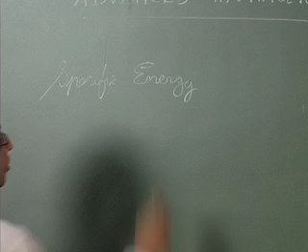We have given the definition of specific energy, and the equation for specific energy was mentioned in the last class. Subsequently, we discussed critical flow in a section, what is meant by critical flow, and all those things. We have suggested subcritical and supercritical flows as well. We have also discussed the criteria for a section to be critical flow.

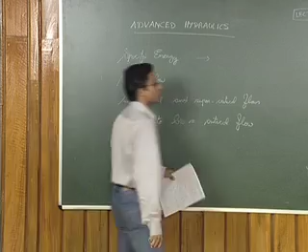This was also discussed in the last class. At the end of the lecture, we suggested that the quiz component for the topic will be given today. Let us start with the quiz itself, then we will continue with the next topics of our lecture.

So, our quiz, the first question is: what is meant by specific energy? You have to give the equation for this, as well as describe it in one or two sentences.

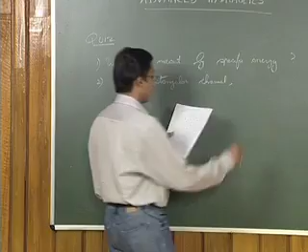The second question: in a rectangular channel, what is the criteria for critical flow? If discharge Q is given, you have to determine the criteria for critical flow in a rectangular channel section. Please note that in a rectangular channel section, what is the criteria for critical flow if Q is given? Also, the width of the channel, B, is given to you. You have to determine the criteria for critical flow in this rectangular channel section.

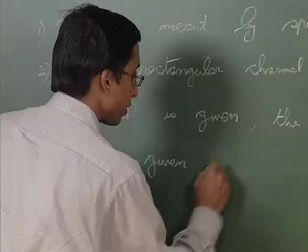The third question: for a given specific energy E, suggest at what state of fluid flow yields maximum discharge, whether it is subcritical, supercritical, or critical.

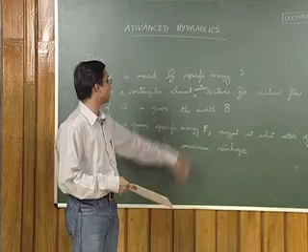So, I will give you 3 minutes to answer this. It is a very simple quiz, one of the easiest quizzes in our entire course. Okay, I hope you have answered the quiz questions.

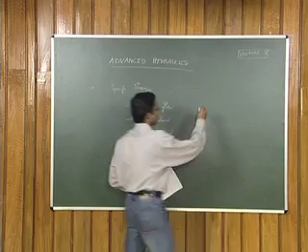Now, let us continue with our lecture. Based on the specific energy concepts, we have discussed critical flow, subcritical, and supercritical flow. Even for any arbitrary cross section of a channel, you were able to determine the specific energy curve. If you draw E versus Y, you get such curves. You can use the various criteria to determine critical flow or to measure the critical depth.

Now, for various cross sectional channels, whether rectangular, triangular, trapezoidal, or anything, it is up to you to engage with this. Take any arbitrary cross sectional channel and try to compute their critical depth or the criteria for critical flow.

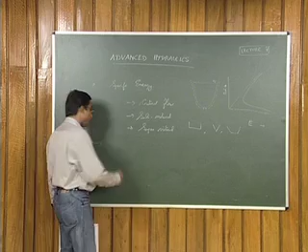What we want to suggest here is, now, if there are changes in the state of flow, that is from subcritical to supercritical, or from supercritical to subcritical, these phenomena occur very commonly in open channel flows. They are encountered in many types of fluid flows in open channels. So you have to understand what changes are occurring, and you should be able to solve such problems. Let us see, for example, what is meant by changes of state of flow.

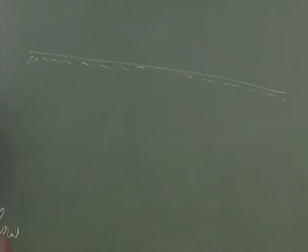If there is a long stretch of channel, and if there is a fluid initially in subcritical state, then over the long reach it reaches a supercritical condition. So this is the supercritical state, this is the subcritical state at this section. The flow in this long stretch changes from subcritical state to supercritical state. These things are commonly encountered in many open channel problems.

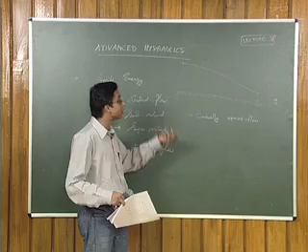This is a case of gradually varied flow. Suppose if the change from one state to another occurs over a long stretch, then such things are gradually varied flow. Suppose if this change of state occurs in a small stretch, they are called rapidly varied flow.

Rapidly varied flow you may encounter in hydraulic drops or hydraulic jumps. We are not going to go into much technical detail right now. At the present state, we are not going to describe much on that.

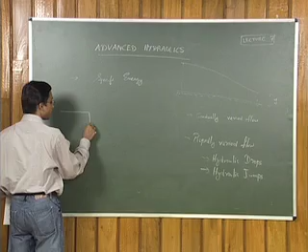Hydraulic drop means, say if the channel is there and the bed of the channel suddenly dips, then the flow here, two free surfaces appear, there will be two free surfaces now, and such type of fluid flow is called a hydraulic drop. Because whatever specific energy you have computed here and whatever specific energy you will compute there, based on energy conservation, you will see that the state changes, from subcritical to supercritical flow, that occurs in this case of hydraulic drop.

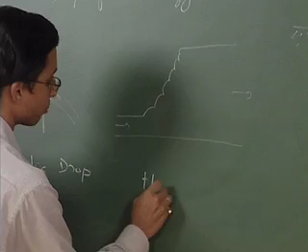This is a free fall hydraulic drop. Here's a hydraulic jump, from a supercritical flow, in a short span it becomes a subcritical flow. From a supercritical flow state, all of a sudden in a short span it converts into a subcritical flow state. Such rapid changes are also rapidly varied flow, seen in hydraulic jumps. Here from supercritical it is changed to subcritical.

We have other modules to discuss rapidly varied flow as well as hydraulic jumps, so we will not discuss much of that here. Instead, we will discuss energy in non-prismatic channels.

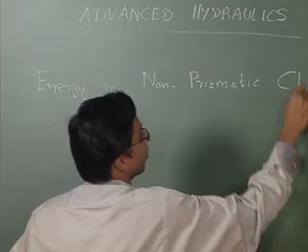Till now we were discussing how to measure energy in prismatic channels, that is, over a stretch of the channel, the cross section of the channel remains the same. That is what is meant by prismatic channels.

What happens if the cross sectional area of the channel varies continuously between two sections? Such channels are called non-prismatic channels. How do you compute energy in such channels? It will be quite difficult compared to prismatic channels.

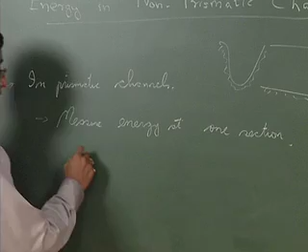In prismatic channels, you have seen that if you measure energy at one section, then you will be able to easily measure or compute energy at the downstream end. That is, from the conservation of energy equation, you will easily be able to compute energy at the downstream if the upstream energy magnitude is given to you.

What happens in the case of non-prismatic channels? In non-prismatic channels, the complexity arises that, say, if the upstream channel section is like this and there is a reach like this, and the downstream cross sectional details are like this...

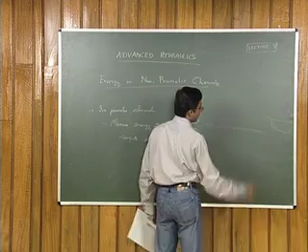There is a change in flow type from the upstream to downstream end. You will see such situations. In such cases, normally in non-prismatic channels, one has to measure energy frequently at several intermediate sections. Then you need to understand what type of change in flow is occurring, whether from subcritical to supercritical or from supercritical to subcritical, and identify those things. So what do you do in non-prismatic channels in such situations?

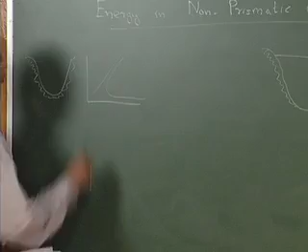As mentioned earlier, for prismatic channels, any cross section will yield you, for a given discharge, an E versus Y curve. Based on this curve, one can identify the flow depth or other parameters downstream in prismatic channels. Now in non-prismatic channels, if you identify such a flow...

See here, if this is section 1 and this is section 2, say if a flow is occurring in this way, that is, the depth of flow is changing in the non-prismatic channel. You have to compute - say if this is a subcritical flow and this is a supercritical flow - you have to draw the energy depth curves for this cross section as well as this cross section. How will it appear now?

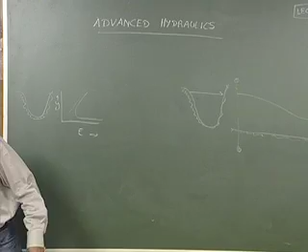Use the same formula. Say in this channel, if I try to draw the energy versus depth curve now, depth is already given to you here, say this is y1, this is y2 at section 2. If I draw in this direction the energy magnitude, then you can easily identify in the following form.

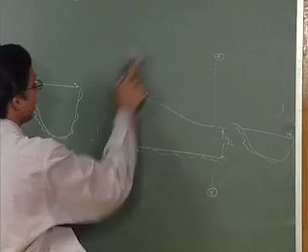Okay, I will just redraw the procedure here in a better way. For the upstream section, depth of flow, you can draw the corresponding E versus Y curve.

So from this particular curve, it is quite understood that the upstream flow stage is a higher flow stage on the E versus Y curve. We have suggested that for the same energy there will be two alternate depths, one at low stage and one at higher stage. So definitely the height of water as given here corresponds to the higher stage. So we suggest that the flow is subcritical. You extend the diagram now to the downstream.

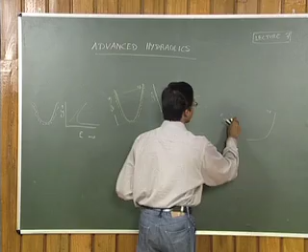Just a hypothetical extension like this. We do not know how the bed is varying, it is a non-prismatic channel. So if you draw the energy curve here, same energy curve, energy versus Y curve, you will see that in this particular case, your energy curve E versus Y may be something of this type, and this particular depth corresponds to some height in the lower stage. This height is a lower stage for this particular energy value, and you will get a corresponding curve like this. So like this you need to compute energy versus depth curve frequently in a non-prismatic channel.

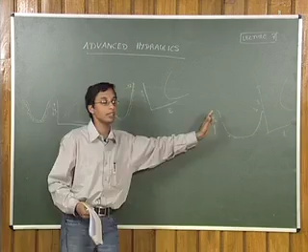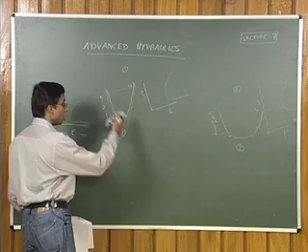If the flow changes from subcritical to supercritical, definitely there will be a section between section 1 and section 2. This is your section 1, and this is your section 2. Between these two sections, there will be some section in between where the depth of flow corresponds to the critical flow in that section. That is quite understood from this graph or diagram. So one may ask how to identify the critical section in a non-prismatic channel. You have to measure both the conditions, then subsequently identify the critical condition or critical flow.

If the alternate depths, whichever are given in the downstream end as given in the earlier figure, if in the downstream end it happens to be the lower stage and in the upstream end it happens to be the higher stage, from the energy depth relationship or energy depth graphs, definitely you can suggest whether it is a subcritical or supercritical flow. At any location in that energy graph, if there is only one depth coming into picture, that corresponds to the critical condition.

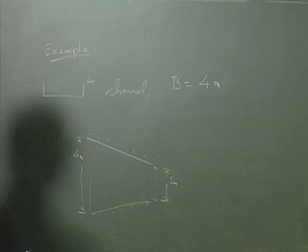Let us do an example. Suppose there is a rectangular channel of width 4 meters. Now this 4 meter width channel, if you view from the top, it is narrowing down to, or passing through a constriction, and this 4 meter wide channel narrows down to 3 meter. This is just an example. These are the side walls of the channel. The rectangular section is maintained here as well. This is upstream and this is the downstream.

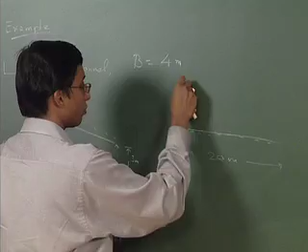If the upstream discharge is given - not only upstream discharge, we are dealing with the steady state problem, so the discharge is constant. If discharge is given as 3 meter cube per second, and if this constriction length is 20 meters, if the upstream depth of flow is given as 1.6 meters, you are now requested to find the water surface profile. You see from this 20 meters, as it passes through the constriction from here to here, what could be the water surface profile? You are requested to compute that. How will you approach the problem, or how will you try to solve that?

At the upstream end, let us give the section as 1-1, at the downstream 2-2, okay? So energy at the upstream section E1, in the rectangular channel this can be given as y1 plus q1 squared by 2g A1 squared. Substitute the corresponding values given here. You are given the depth of flow as 1.6 meters, discharge is given, area you can easily compute: 1.6 plus 3.0 whole squared by 2 into 9.81. A1 is your width, rectangular channel width is 4 meters. So we can suggest now 4 into depth of flow, 1.6 whole square. You calculate them, you will see that you will get the value as 1.6112 meter.

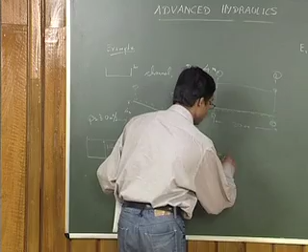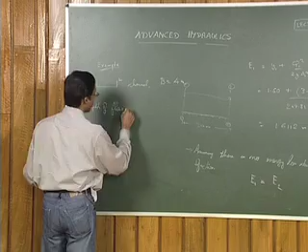Now in this problem we are assuming, please note that, assuming there is no energy loss due to friction. Based on this assumption, it will be seen that your energy at section 1 will be same, specific energy at section 1 and specific energy at section 2, they will be same. Now you know the magnitude of energy at section 1, this is 1.6112 meter. You also know depth of flow at section 1, or you can say at upstream, this is equal to 1.6 meter.

What could be the depth of flow in the downstream end when the flow passes through this constriction? You can find alternate depth at the upstream end. How will you find the alternate depth at the upstream end? E1 is equal to 1.6112 meter, or to avoid confusion, let us say at the upstream end E, I am just substituting it as E, this is equal to 1.6112 meters, and the equation for energy is nothing but depth of flow plus q squared by 2g A square.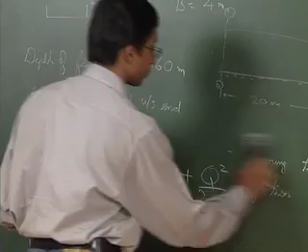As this is a problem where the discharge is given, you can write this as 1.6112 is equal to y plus 3 squared by 2 into 9.81 into 4y whole square. So, this will be the equation for the corresponding depths of flow.

One depth of flow, that is y equal to 1.6 meter, is already given to you, and when y is equal to 1.6 meters, this equation is satisfied. What is the alternate depth now? For a given specific energy, there are two alternate depths, one the lower stage and one the higher stage, and we do not know whether this y equal to 1.6 meter is a higher stage flow or a lower stage flow.

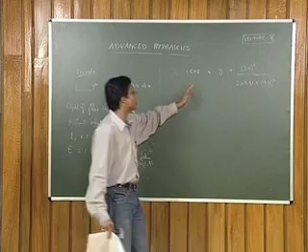You have to solve the corresponding higher order equation that is developed from this given relationship. What is the higher order equation that comes out from this relationship?

If you substitute all the values, keeping y as an unknown factor, and calculate all the things, you will get 1.6112 is equal to y plus 0.02867 by y square, or I can write this as a cubic equation: y cube minus 1.6112 y squared plus 0.02867 is equal to 0, a third degree equation.

The solutions for this equation, as it is a third degree polynomial, there will be 3 solutions. So if I write it, y1 is equal to 1.6 meter.

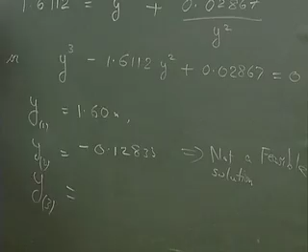Another solution that satisfies this equation was found to be minus 0.12833, and you know that in open channels this is not a feasible solution, since depth of flow cannot be negative. The third root found for this equation was 0.1396 meters.

So we get 2 feasible solutions: y equal to 1.6 meters and y equal to 0.1396 meter. These 2 are the alternate depths. So at the upstream end, the alternate depths are y1 equal to 1.6 meter, and the corresponding alternate depth equal to 0.1396 meter. This is a subcritical flow and this is a supercritical flow.

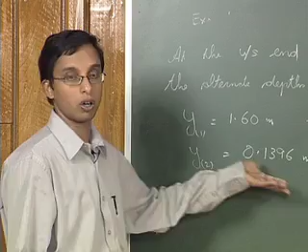The flow passes through the constriction and we have not provided any hydraulic drop or jump in between the constriction. So we need to compute the depth of flow in the downstream section, and based on that identify whether it is a supercritical, subcritical, or critical situation.

At the downstream section E2, neglecting the losses, this is same as 1.6112 meter. Again use the same relationship at downstream: y plus q squared by 2g a square. This is equal to y plus the discharge is same...

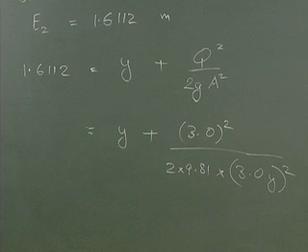And area. At the downstream, the width of the channel is 3 meters, so 3 into y whole square. You will get a corresponding third degree polynomial. On rearranging the terms, you will get the third degree polynomial of the following form: y cube minus 1.6112 y squared plus 0.051 is equal to 0.

Solve this cubic equation. We get 2 feasible solutions; the third one is non-feasible, which I am not going to write here. The feasible solutions are 1.591 meters and 0.1894 meters. So at the downstream end, we do not know which depth is coming into the picture.

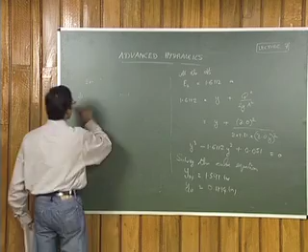Can you give a guess, in the upstream end and downstream end, as the flow occurs through a constriction?

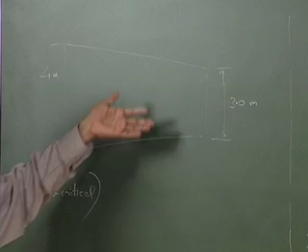Definitely at the upstream end the flow is subcritical. And in the downstream end we have two alternate depths, 1.591 meters and 0.1894 meter, which could be the depth if there are no structures provided in between. When the flow occurs through this contraction, without any hydraulic drop, hydraulic jump, or other structures, the subcritical flow should be maintained, and hence at the downstream end your depth of flow will be 1.59 meters. Seeing the magnitude, you will see that the flow profile or surface is almost horizontal as subcritical flow is maintained, though the velocity will be different.

Till now we have discussed the energy equation and conservation of energy in open channel flows. Let us now consider the momentum equation. In one of our earlier lectures we discussed momentum and momentum correction factor in open channel flows; let us come back to that. How do you apply the conservation of momentum, and how do we apply various laws of physics related to momentum in fluid flow in open channels?

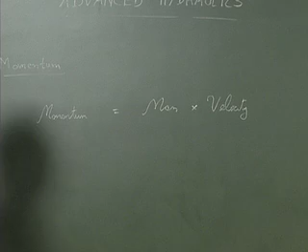Momentum is nothing but mass into velocity of an object. The same phenomenon if you apply in open channels, you can use the same principles to calculate the momentum and also conserve it—from Newton's second law, the rate of change of momentum is equal to the net force, wherever in whichever direction you are dealing, the net force in that direction will be equal to the rate of change of momentum in that direction. Let us come into that.

If you take any arbitrary volume of liquid, mass is nothing but density into volume, then into velocity will give you the momentum, that is rho del V into V, volume. For volume I can write del V into velocity.

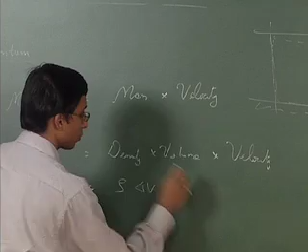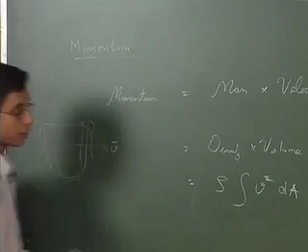We suggested that if you are using for any cross section, if you are taking the average velocity term, then to compute the momentum you need to incorporate the momentum correction factor beta into the computations. This is nothing but rho into V squared dA. From any velocity profile, this is nothing but integral of v square dA. This can be given as beta rho average velocity into area.

Most of the time we are dealing with constant discharge, so beta rho Q into v bar, like this also we can write.

So from Newton's second law, that suggests that rate of change of momentum is equal to the resultant force in the body.

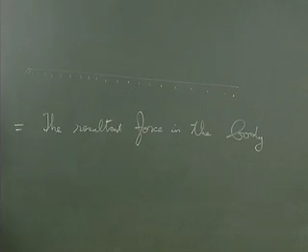So if you consider an open channel section, if you consider a stretch in the open channel, take two cross sections. Suppose the channel is having a slope with the horizontal angle theta. We are considering two cross sections: section 1 having area A1, and section 2 having area A2.

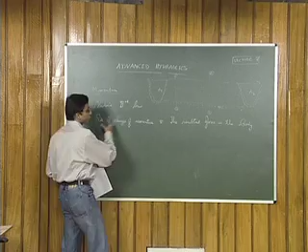What do you mean by rate of change of momentum? As we are dealing with steady state flow, whatever momentum is there comes from the mass of water stored between these two sections. Let us mark this as a dotted line between two sections. If between these two sections this entire stretch is at a length L, and one point is located at Z1 height, this other portion is located at Z2 height.

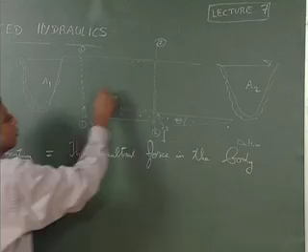Consider this dotted portion—this acts as a volume of water. We can consider the volume of water within this reach now. You have a cross section here, a cross section there, and this much stretch in between. The mass or amount of water stored here gives you the mass of water in this entire portion. Now the momentum flux that comes into the section from the left hand side, and whatever momentum crosses through the section on this side, that gives you the change in momentum.

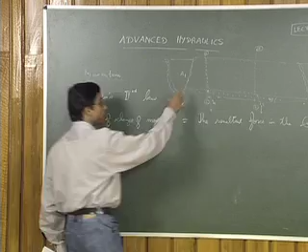The change in momentum—whatever momentum comes in and whatever momentum goes out, the difference between those two momentums gives you the change of momentum. And the rate of change of momentum means the rate at which the momentum gets changed, that is the change in momentum, you can say del m.

If I am defining m as the momentum, m is equal to mv, beta mv, then the change in momentum can be given as del m between these two sections. That can now be computed. That gives you the net force that is there in the body now.

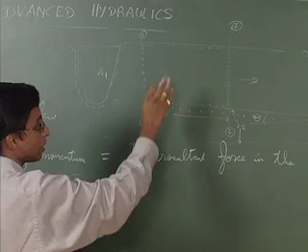So the net force will occur in the direction of flow. The direction of fluid flow is here in this particular direction. As open channels, we are predominantly considering one dimensional fluid flow, where there is no fluid flow in the vertical direction—that is not being considered here—only the flow along the bed of the channel.

So how will you compute the change of momentum here? I can say del m is equal to—first let me compute momentum. Momentum at section 1 is equal to beta1 rho Q V1 bar. Momentum at section 2 is equal to beta2 rho Q V2 bar.

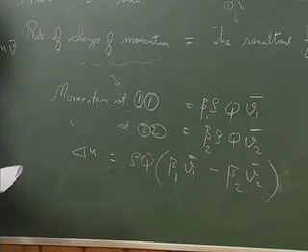The change in momentum will be del m is equal to, you can take rho Q out, beta1 V1 bar minus beta2 V2 bar. So this will be the change in momentum. The rate of change of momentum, or the change in momentum per unit time, gives you the net or resultant force of the entire control volume. Whatever dotted line you consider as a control volume, whatever force leads the flow, that can be corresponded with respect to the change in momentum or rate of change of momentum.

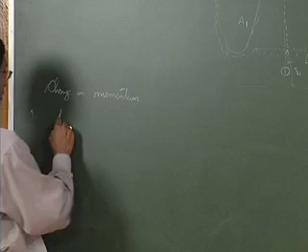So, we suggested that change in momentum in a time is equal to beta 2 V 2 bar minus beta 1 V 1 bar. That is the momentum coming out and momentum coming in. The difference gives you the change in momentum, and the change in momentum per unit time is the same, equal to rho q beta 2 V 2 bar minus beta 1 V 1 bar.

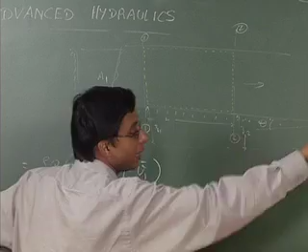What is the net force in the direction of flow? If you look into this control volume, as mentioned earlier, there are no flows in the vertical direction, and assuming predominantly it is in the direction of the inclination of this bed itself. So, the direction of fluid flow is in this direction, and the net force will be in this particular direction.

How will you compute that? You know the weight of the liquid stored within this volume, or weight of the liquid from this volume of water. You can give it as rho g into some volume V, right, rho g into this volume of water. So, we do not know what is the volume of water, we can compute, we will come into that.

There, say if you take this section out, I can just take that section out now. This is how your section will look like. Here the depth of flow is y1, here the depth of flow is y2.

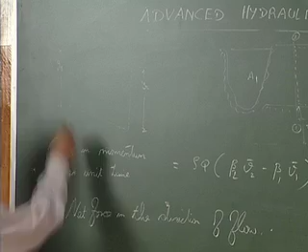So, if you take the components out, as discussed in our earlier lecture, whatever pressure is there will now act on this particular plane, because we are taking this particular volume out now like this. So, in the downstream the pressure force will be in this direction, in the upstream it will be in this direction, because we are taking a plane perpendicular to the board now. So, the force due to pressure, I can give it here in this direction F p, or F 1, let it be here F 2.

This again can be made into components, one in the direction of flow, one normal to the bed, here also like this. So, I can give this as F p 2, F p 1, this one also in the vertical direction, the components will be there. So, we are interested only in the direction of fluid flow, that is along the bed, only the net force in that direction we are interested. So, let us consider whatever is there in the direction of flow.

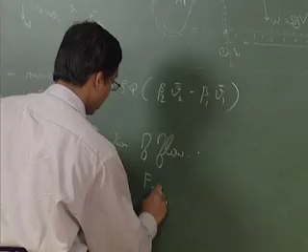So, W, its component will be there, W sin theta in this direction. So, I can say the net force now will be equal to F p 1 minus F p 2 opposing the flow, W sin theta, minus frictional force -- there will definitely be frictional force opposing the fluid flow. So, these quantities now you can equate it here. I will get this as rho q beta 2 V 2 bar minus beta 1 V 1 bar is equal to F p 1 minus F p 2 plus W sin theta minus F f.

Once you equate this, you can now subsequently suggest various simplifications. Say if the channel slope is not that much, you can see that the component of weight in the direction of flow will be negligible. If there is no frictional resistance, or if the frictional resistance is negligible, even that component can be eliminated. But this is the momentum equation in general for such open channel fluid flow conditions.

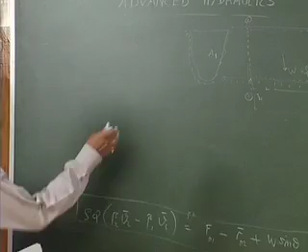Generally for fluid flow, if you have parallel flow or gradually varied flow between two sections 1-1 and 2-2, then you can suggest that your pressure is hydrostatic, or in section 1-1 at any depth y, at any depth of flow y, P1 will be equal to rho g y1 cos squared theta, P2 is equal to rho g y2 cos squared theta. These were derived earlier.

Therefore, you can suggest that from this pressure you can easily measure the force due to this pressure.

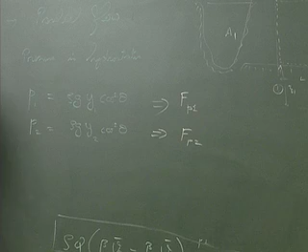You can easily measure them. Pressure into area gives you the force in that corresponding direction. So that can be computed. You can substitute those things subsequently if it is parallel flow or gradually varied flow.

Suppose what happens if I suggest a rectangular channel, width b. What happens if this is a rectangular channel? That is, this section will look like this and this section will look like this.

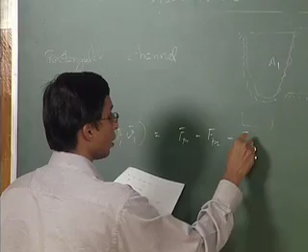You can now write the corresponding equation, rho Q, beta 2 V2 bar minus beta 1 V1 bar. This is equal to F P1 minus F P2 minus F F plus W sin theta.

Your F P1, this can be given as half rho g y1 squared into b. I hope you understood what this means. F P1 is half rho g y1 squared b. F P2 is equal to half rho g y2 squared b. So you substitute this here.

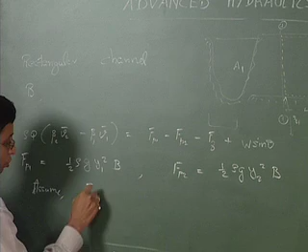Another thing is, suppose we assume the frictional resistance F f, this is nothing but something related to the weight of water in this volume, and its component, which you can relate to weight as well as the frictional head. So I can write it in the corresponding way: this is rho g b y bar into h f dash, where h f dash is the frictional head.

It is the frictional head, units of length, and y bar is the average depth of flow between the two sections 1-1 and 2-2. I can easily suggest that this is nothing but y1 plus y2 by 2. If you incorporate this relationship and all the other terms into the equation, I will get the corresponding form.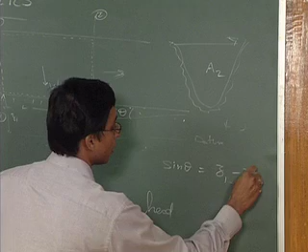Also you can suggest the sin theta term here. Sin theta is nothing but z1 minus z2 by L. You can also see that...

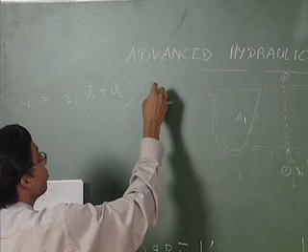As q, the steady discharge, will be same throughout, I can compute it as related to the average depth of flow. For that I can write q equal to the average velocity between two sections: V1 bar plus V2 bar by half, that is the average velocity between these two sections, into the average depth, into the width of the channel. So if the width of the channel is not changing here, you can correspondingly write it as well.

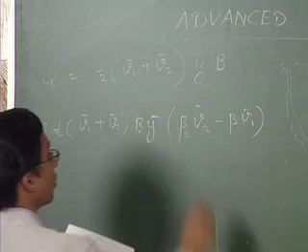So we will get q in the following form. Our momentum equation becomes: rho into half of V1 bar plus V2 bar, into B y bar, this is equal to rho g y bar, L into B, Z1 minus Z2 by L, plus...

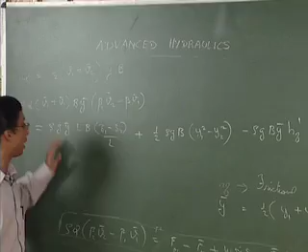This momentum equation, for this particular case of a rectangular channel having width b, we can write in the following form. Please note this is for any general area, and for the rectangular channel of width b, this can be represented in the following form.

You can cancel out whatever terms are repeating. You see rho b y bar repeating on LHS and RHS, you can cancel it out. You can also substitute appropriately the terms. You see y1, here half into y1 plus y2 term is coming, that you can give as average depth y bar. Like that you can eliminate the terms.

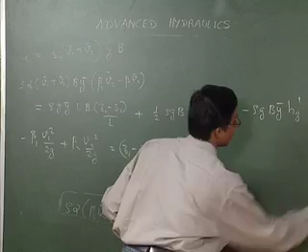This can be written as minus beta1 V1 squared by 2g plus beta2 V2 squared by 2g is equal to Z1 minus Z2 plus y1 minus y2 minus h f dash, or rearranging: Z1 plus y1 plus beta1 into V1 squared by 2g is equal to Z2 plus y2 plus beta2 into V2 squared by 2g.

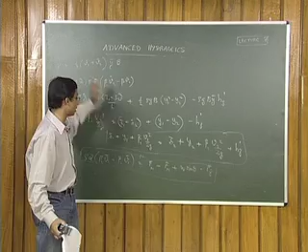You have seen a similar relationship already in the energy equation. Another thing is coming here now, for example I just forgot to write h f dash here. A similar relationship as found in the energy case is again found here when computed through the momentum equation. The h f dash, the frictional head computed using the momentum equation, is quite different compared to the one computed using the energy equation. Here you are using the average depth term y bar, using those things, the things come out here. So there is a little difference between the energy equation and momentum equation for the rectangular channel.

However, for gradually varied flow or uniform flow and all, you will see both are same. Now we will discuss the concept called specific force.

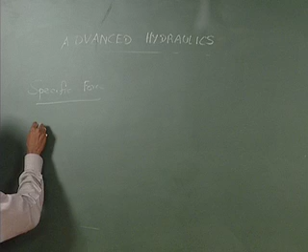What do you mean by specific force? What was the momentum equation you have seen earlier? It was rho q times beta 2 V2 bar minus beta 1 V1 bar, equal to F p1 minus F p2 plus w sin theta minus F f. This was the momentum equation discussed earlier.

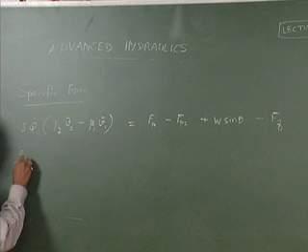So in this particular case, for any arbitrary cross sectional channel, need not be rectangular or triangular, if your slope is negligible, and you are taking a stretch of flow, say section 1 and section 2, such that it is a small stretch, the effect of friction can be neglected. Similarly the weight component due to the slope is also neglected.

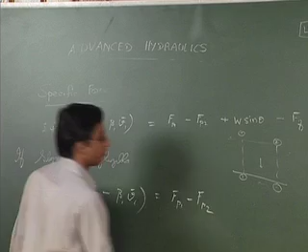You can write your corresponding equation now: rho q times beta 2 V2 bar minus beta 1 V1 bar is equal to F p1 minus F p2. Please note that we are talking about prismatic channels.

So in the prismatic channels, if you neglect these quantities, taking a short stretch where friction force can be neglected as well as the weight due to slope being negligible, you can write the equation as rho q times beta 2 V2 bar minus beta 1 V1 bar equals F p1 minus F p2. Most of the cases in such prismatic channels, we can approximate beta 2 equal to beta 1 approximately equal to 1.

If that approximation is also true, then you can write this as rho q times V2 bar minus V1 bar is equal to F p1 minus F p2.

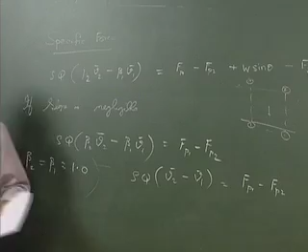So what is F p1? What is F p1 from here? Your F p1 is nothing but rho g A1 into H1 bar, for a prismatic channel.

The area is A1, and the centroid of this area from the free surface is the term called H1 bar. Your pressure force will act at the centroid, so that centroid point is H1 bar from the free surface. F p2 is rho g A2 into H2 bar. H1 bar is the distance of the centroid from the free surface in the upstream section, and H2 bar is that distance in the downstream section.

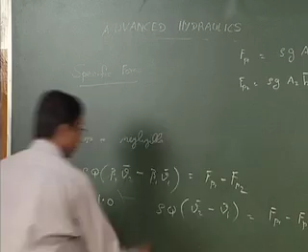You substitute the following quantities, and you will see that this momentum equation becomes: V2 bar is nothing but q by A2, V1 bar is equal to q by A1.

Substitute the following quantities, you will get q squared by g A1 plus H1 bar A1 is equal to q squared by g A2 plus H2 bar A2.

If I get the following equation, the momentum equation, in this simplified case where slope is negligible, friction is negligible, and in such a prismatic channel where momentum correction factors are also 1, you are getting this relationship. This is the momentum flux that passes any cross section of the channel.

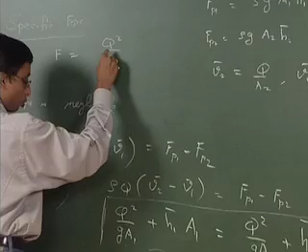This term is related to the pressure force. What will you get now? If you summate this, I can define this as a quantity called specific force, where F is equal to q squared by g A plus H bar A.

If I define this particular term, you have seen that for a small stretch, both the upstream and downstream quantities are the same. If you define this term as specific force, you will see that the specific force is the same in the upstream and downstream, irrespective of the type of flow. We will deal with much more aspects of the specific force in other classes.